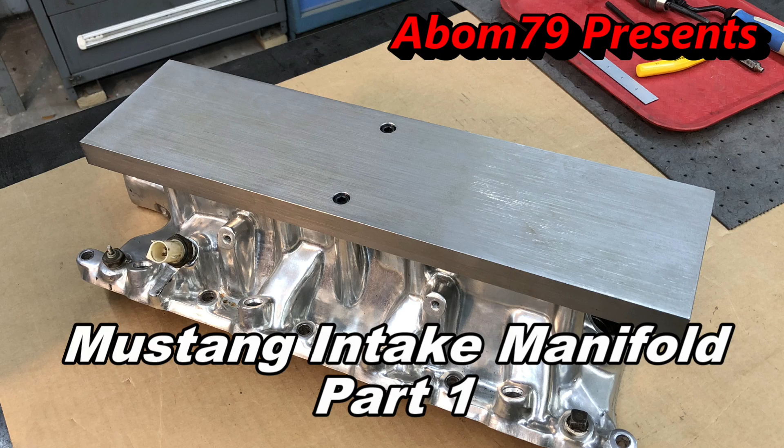I've got another intake manifold job to do for my buddy Phil over at Mayham Motorsports. He's the one that I machined the last manifold for. And this is another manifold that's going to a different car that he's been working on. I believe he said it's off of a Mustang. I believe this goes to the 5.0 Mustang.

And the problem is he can't get anything to seal up. Apparently this is an aftermarket intake that was on the car, and he can't get this stuff to seal right. The main culprit is this surface right here, which is where the thermostat goes in. I'll get you a better shot and show you, but I can put just my scale on there and see that this area right in here is way low. That's probably going to be 25-30 thousandths off right here. So this needs to be machined square.

And I've been checking all the other surfaces. This surface here, this is my good straight edge that has been reground. I can put this across there and I can actually rock it slightly. So it's off a little bit, it's a little bit high in the middle. So this needs to be cut right there. And then he said he also had another issue with, I don't remember what side, but one of the cylinder heads had a very minor leak to it and he couldn't get it to seal up.

So I checked these faces here that go against the cylinder head, and they're not perfect either. So we're going to plan on cutting all these faces. We're going to cut both sides that match up to the heads and make sure that they're good and straight. And we're also going to machine the top and then this face right there for the thermostat.

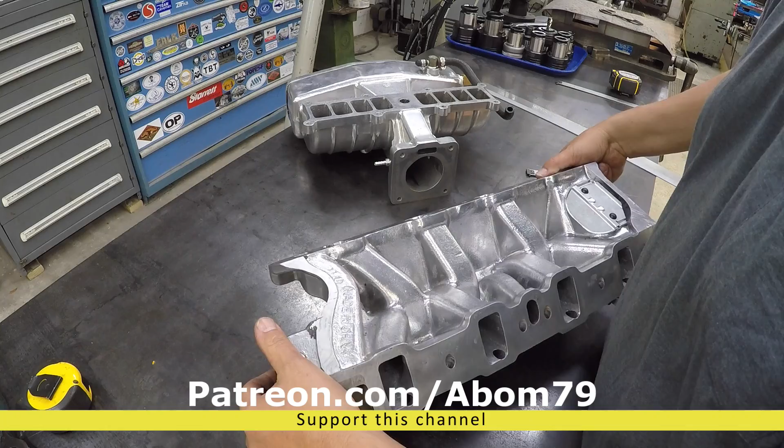The bottom of this thing was machined originally from the factory, so we've got a machined face right there as well as this. This should be nice and square, so we'll probably start with this face right here and flip it on like that, on some parallels. And what we can do is machine this face. We'll side mill that with an end mill, and then we'll run our cutter across this face right there and get that cut.

And then my plan from there is I'm going to take a piece of flat bar and make a fixture plate that's going to bolt to this right there. We'll use 6 of these holes, bolt a fixture plate down, and that way we can flip it over onto the fixture plate and be able to hold it. Then we'll go to the shaper and use it to rotate the table around and get this squared up. We'll cut both of these sides on the shaper. That's my plan of attack.

This is the piece that goes with it right there, and I've been doing some checking with the straight edge on these faces. He just wanted me to check it. He didn't think that there was anything wrong with them, but I'll check it before we get through to make sure that these are good. If these don't need to be cut, then we won't worry about that. He just wanted me to double check it while everything was apart. So let's go ahead. We'll start with the K&T mill and get our fixture plate going, and then we'll start getting all this milled in.

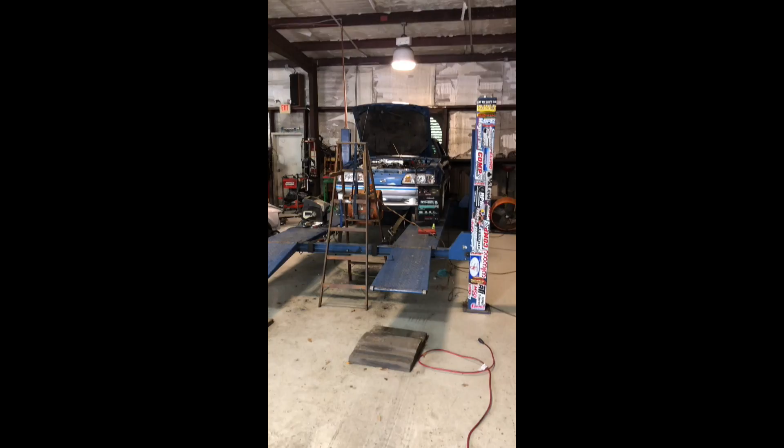This is the plate that we're going to use to make the fixture to hold this. This will also be sort of like a universal fixture for later jobs. We'll save it in case we ever need to use it again. It's a piece of 1 inch by 5 inch flat bar. It's been rusted up outside, so I went out there and wire brushed it good, but it was rusted all over. So I'm going to clean it up. I'm going to use a shaper. We've got it cut 19 inches long, and we're just going to square it up, make it nice and clean on the edges.

Another great use of the shaper is to cut rusty metal like this. And the plan is to machine it. I'll have a couple holes drilled in so that we can just use the center T-slot of the table on the shaper to just hold this plate down. But it'll also be drilled and

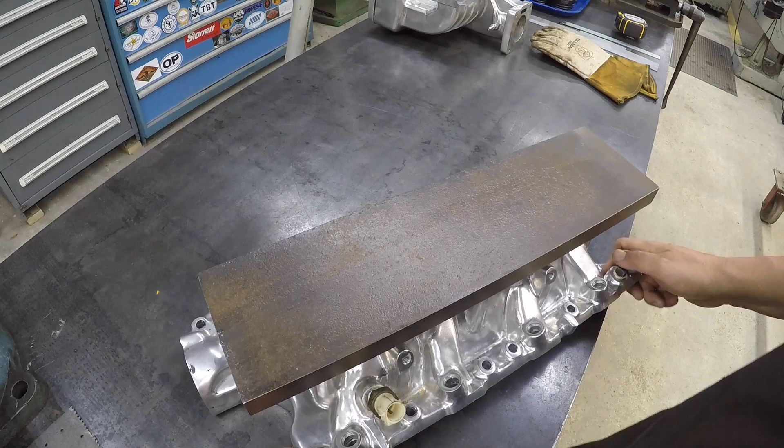counterbored for this hole pattern up there, 6 of the holes, so that I can just bolt it to the top just like that using our socket head bolts. And then this is what we'll clamp down onto the table. It'll be flipped upside down. So we'll give you some highlights along the way of getting this thing cut in and get it machined.

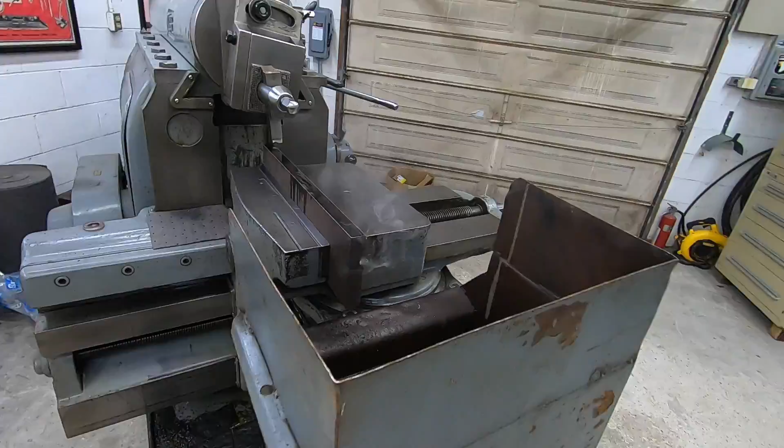We'll get both of the sides cleaned up first. Just make one pass across both of the sides, and then we'll do the top and bottom. That's just a 10 thousandths cut just to clean the surface up.

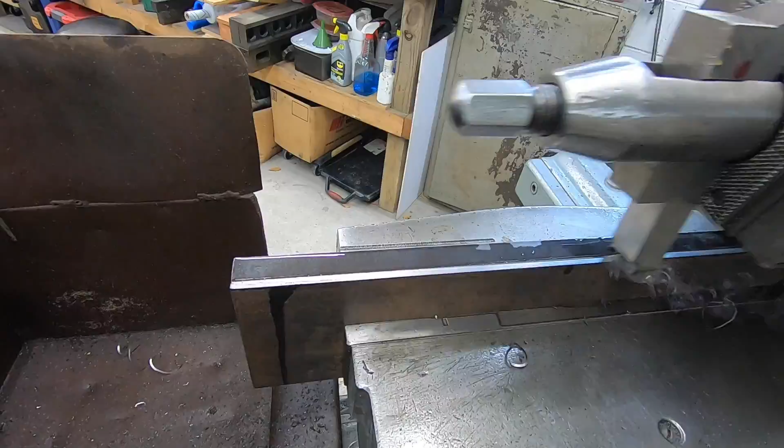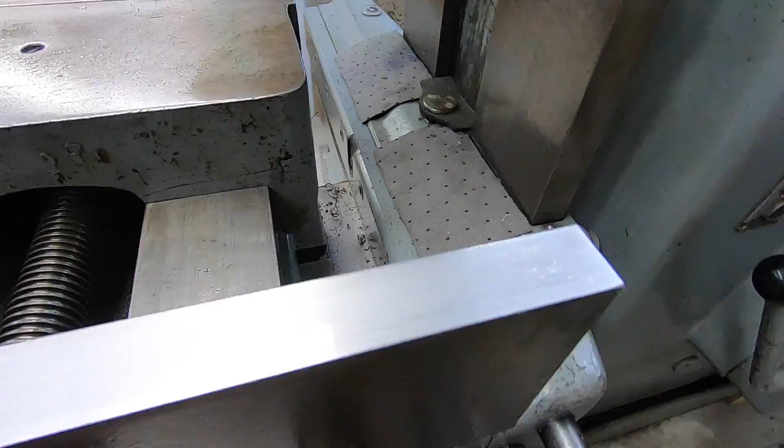Finish is looking good. I touched up the tool bit before I started. I reground it and then honed the corner, and it's leaving a nice shearing action on the metal. And I just hit that with my stone to deburr any fuzz on there. Ready to flip it over and cut the other side.

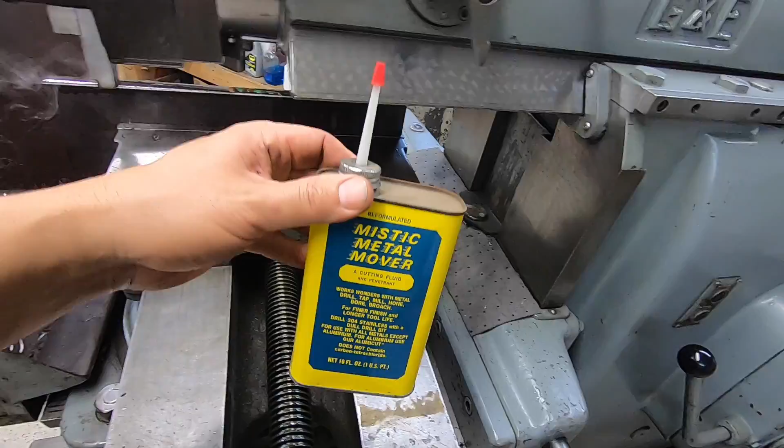This is the cutting fluid I'm using here, a Mistic Metal Mover. This was given to me by one of my viewers a few years ago, and I use it every now and then. I wanted to try it on the shaper and see how it does. It's got a little less smoking action than my sulfur-based oil. It seems to be doing good on there.

Got our first top side getting cut in. Won't take very long and we'll have that sucker done. So I thought I would go ahead and touch on one of the issues I always get on why a shaper. So let's go ahead and talk about just this workpiece right here.

This is a rusty piece of steel, and this shaper does a great job on cutting in rusty, pitty, dirty material using that high-speed tool that I can grind versus a carbide, a rotating cutter, or even a shell mill or an end mill or a fly cutter. I don't really like using fly cutters unless I really need to, but it does a good job on that kind of job right there.

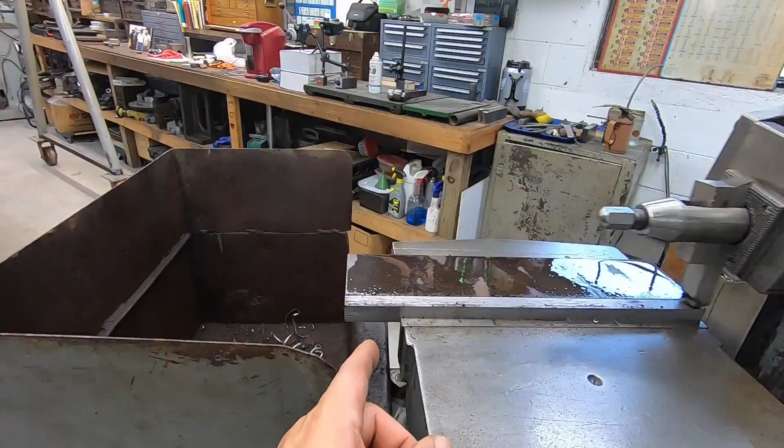The other thing, we've got the vise right here is 16 inches long. So you got a lot bigger vise than our standard milling vise over on the milling machine table. That workpiece is 19 inches long. You see I'm just hanging it off a little bit on that side. So you got a lot of rigidity holding that piece. And just look at it, it's doing a great job. Once I clean that oil and rust off, it's gonna be a beautiful finish on there.

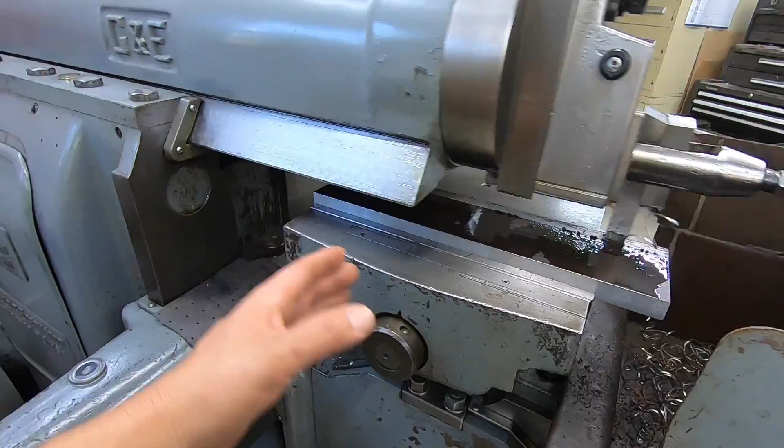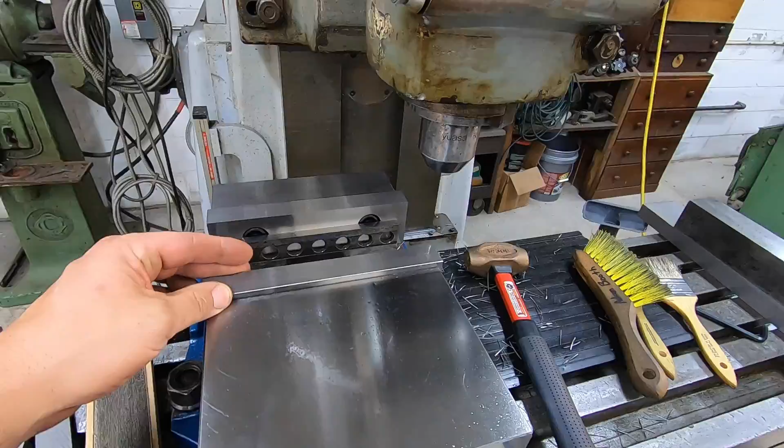So, like I said, you see how wide the vise is, so you got a lot more support holding the workpiece. Even if I'm using my 8-inch milling vise here, you got 8 inches jaw width and you've got a lot more material hanging off the end out there. And not to say that that wouldn't work over here, but you really want to support more of your workpiece if you can. So you could put some jacks under it or whatever to try to stabilize it.

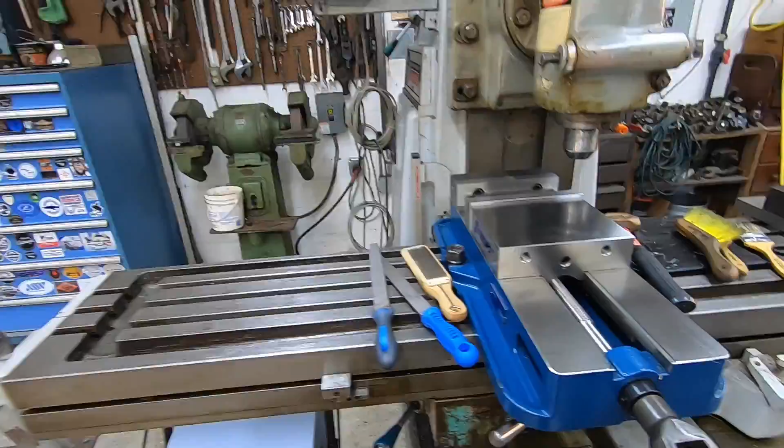So if this vise was not set up on this machine, I probably will always go over to that shaper and use that machine if it's available, if that vise is set up. A lot of times it depends on which one's set up.

If the shaper is ready to roll and I'm just ready to start cutting, I'm gonna go over there and do that. If the shaper is not set up and I gotta mount the vise on it, true the table up, but this vise is ready to go, then I'll probably come over here and do it here instead, just because I've got less setup to do. So that's one of the factors there as well, is which machine is ready to go.

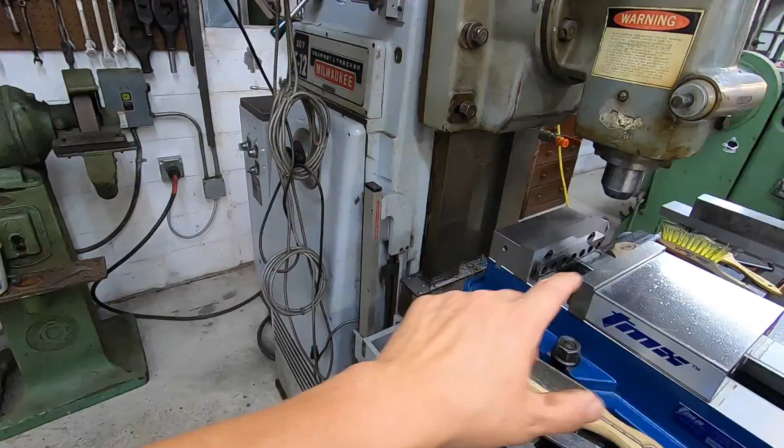You know, you gotta install a face mill in there and get that set. And the other thing is, when you use a big face mill over here, if you're gonna do some milling, it slings these chips everywhere. So you've got a big cleanup to do once you do a little bit of milling over there. Look at the cleanup I gotta do here.

It just puts it right in this box here. Very little gets on the floor, on the machine. So a lot easier cleanup over here because you have better chip control of the chips coming off into the box.

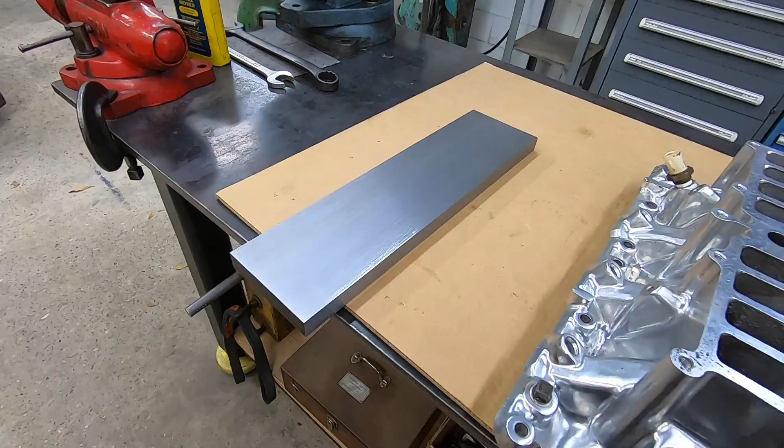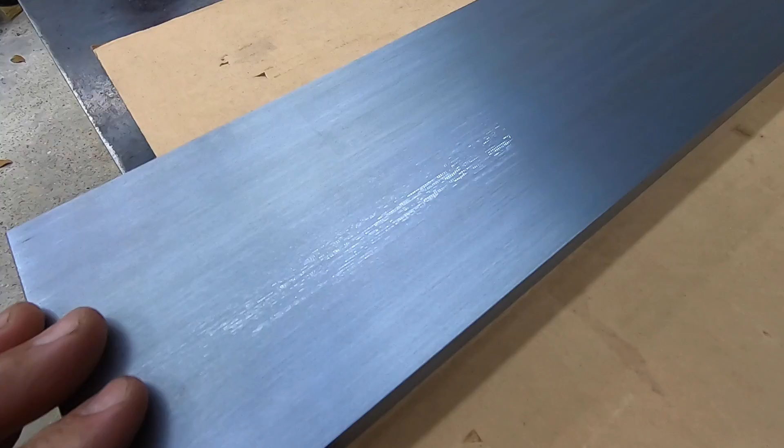We're finished up cutting the fixture plate there on the shaper. It turned out real nice. We've got it deburred and clean. You can see it just does a good job. And that's a rough cut right there. So if we wanted to finish that, we can certainly make a lot nicer finish. But I like the way that feels. It's got the cut lines in it, and I rubbed the stone over it there to make sure that it's all smoothed off and good.

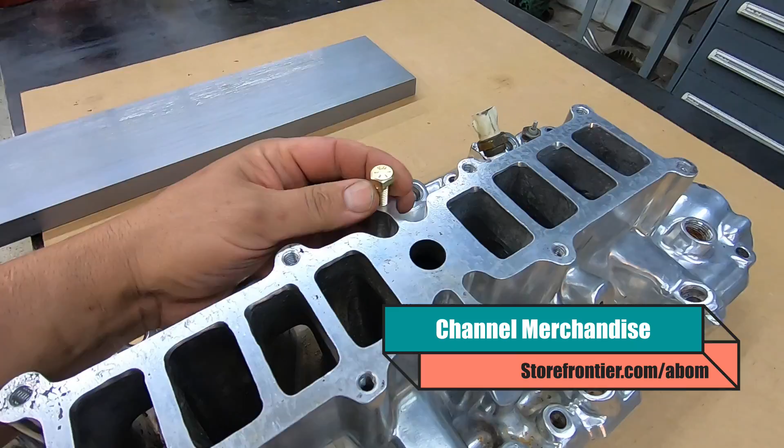So the plan is to drill it, counterbore it for 6 holes. You got the 2 in the center, and then we got the 2s on each end right there. These are 5/16. Verified it with a 5/16 bolt. I'll need to run down to my local hardware store and get me some socket head bolts, proper length, because I don't have any. All I've got is these guys.

So we'll probably go ahead and set this in the mill. Go ahead and get these 2 first, since these are going to be in the middle. We'll just center up in the mill, drill and counterbore those 2, and then we'll get it bolted on there. I'm going to use my transfer punches. We'll put our little transfer screws here, bolt it down with this, that way it's kind of square, and then we'll tap it and that'll locate the placement of the other 4 holes there.

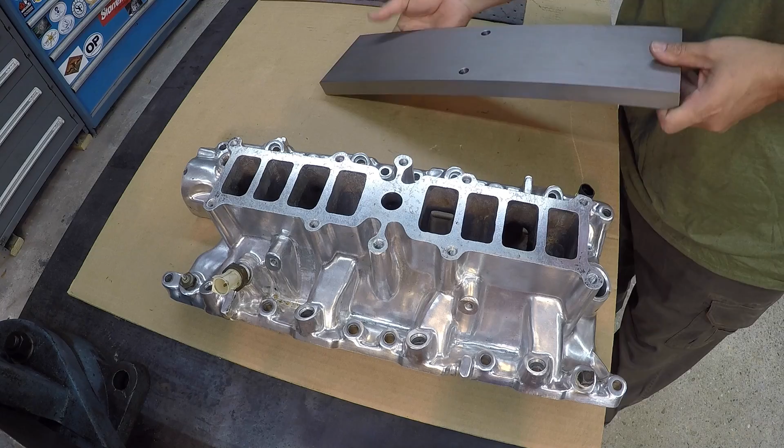I went ahead and got a head start on the fixture plate here. We got 2 of the holes drilled in there, and that's going to be for these 2 center holes right here. And the reason for that is, since these look like they're kind of symmetrical with the shape of the part, we want to go ahead and get this bolted down, and we're going to transfer the end bolt locations to the plate. And I just wanted to make sure it was kind of square in line with it there.

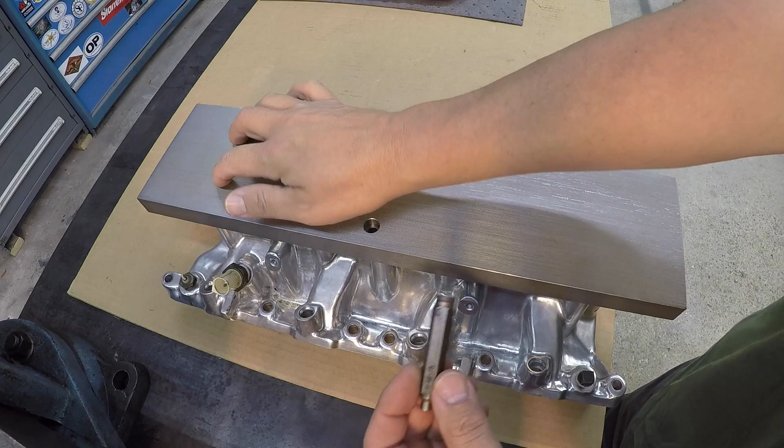So what we're going to use are these Mayhew transfer screws, and we'll put these in these 4 outer holes. We'll bolt the plate down like that with our Mayhew transfer screw points just barely sticking up out of the holes, and then we'll take our soft blow hammer and just tap each end to transfer the hole location, and then we'll go back to the mill and drill and counterbore those 4.

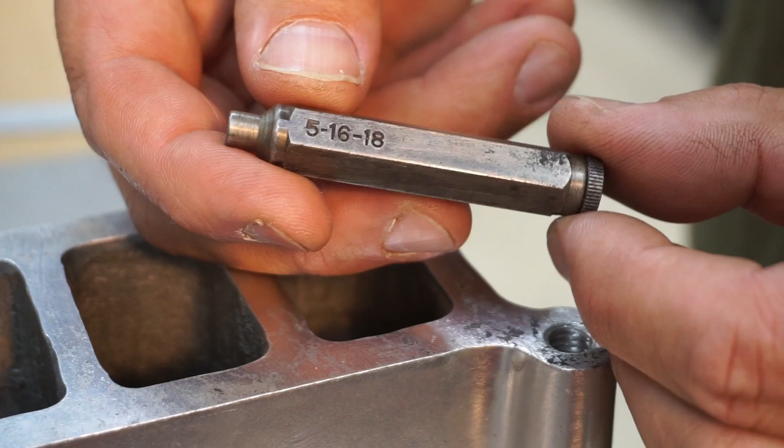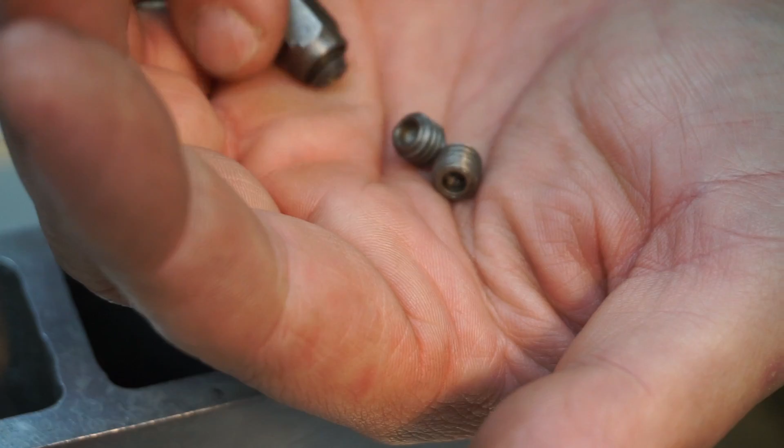We're going to be using these 5/16 socket head screws right here to hold it down in place. This is the little set of transfer screws that we're going to use, made by Mayhew. I've got a different set, different range of these. See, this is 5/16-18, so you just unscrew the cap there, and inside of it you'll have your transfer screws. So I'm going to take 4 of them out of the set right there. Take these out of the way, and then put our cap back on.

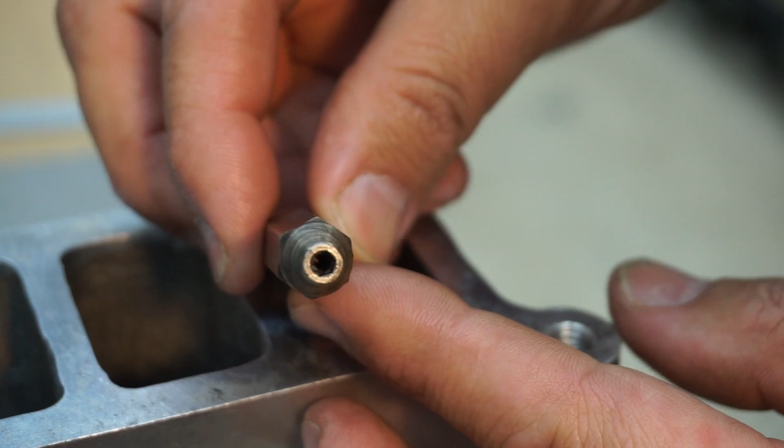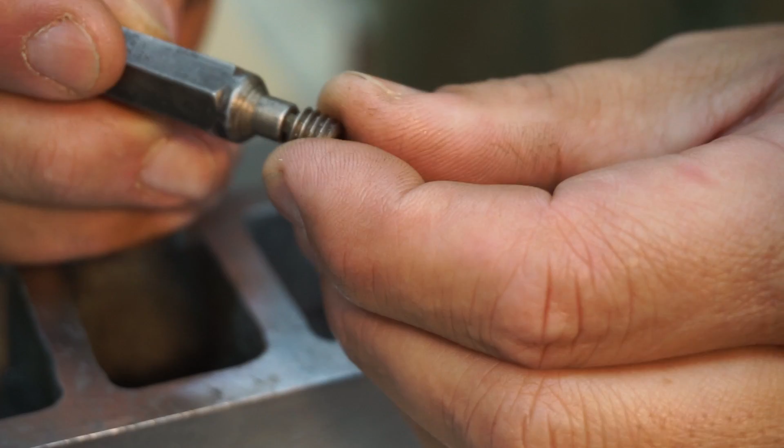And then the end of the tool right there is the install tool. You can see we've got our point on the end of them. Go ahead and insert it into the install tool there in the case. It's a multi-purpose tool, and we'll go ahead and just get them screwed into the hole here. We'll get these 2, and then we'll set our height of the point.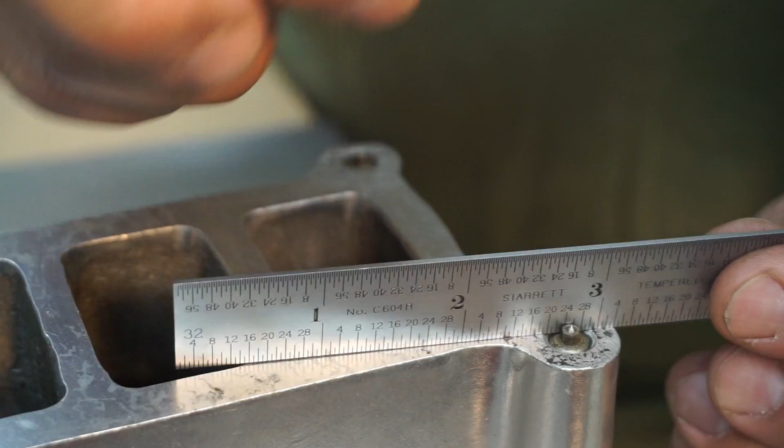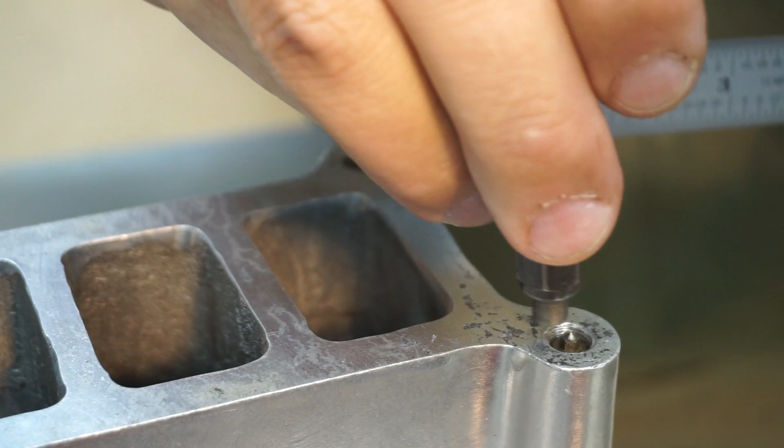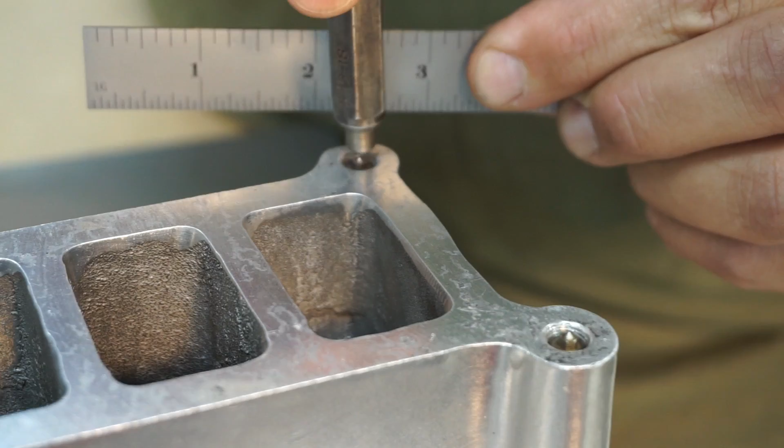And usually what I do is I'll just take the scale there, lay it up against the face, and screw it in to where it just goes over the hex, but the point of the screw is sticking up. So it doesn't take a lot, it's just touching it right there. So that's it right there, just the point is sticking up. Alright, and we'll do the same thing over here. There we go, just the point of it. Alright, and we'll do that on the other end there as well.

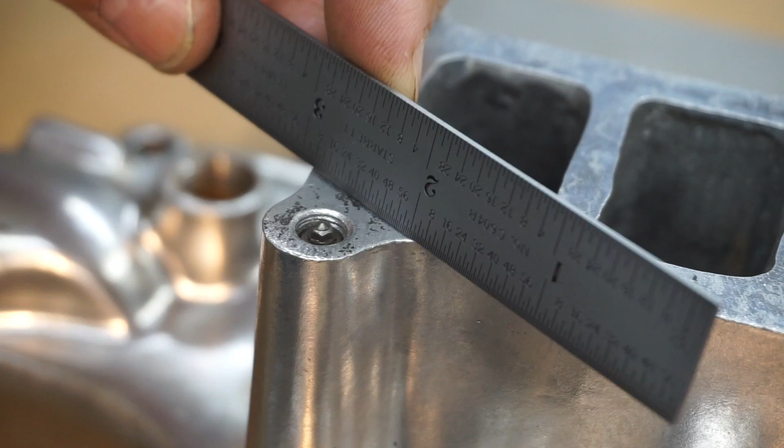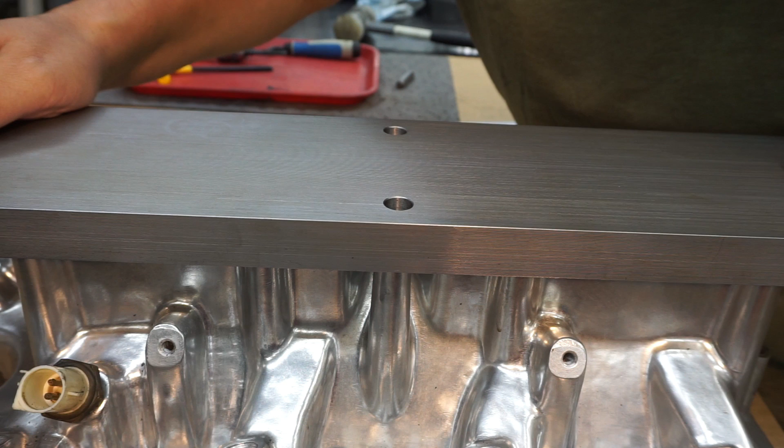Okay, I think we got all 4 of them ready to go. We'll go ahead and take our fixture plate here and set it on there nice and easy, so we're not making a bunch of scratches and dents there where the transfer screws are. Get our bolts in there. Get one started, and then we'll start the other here.

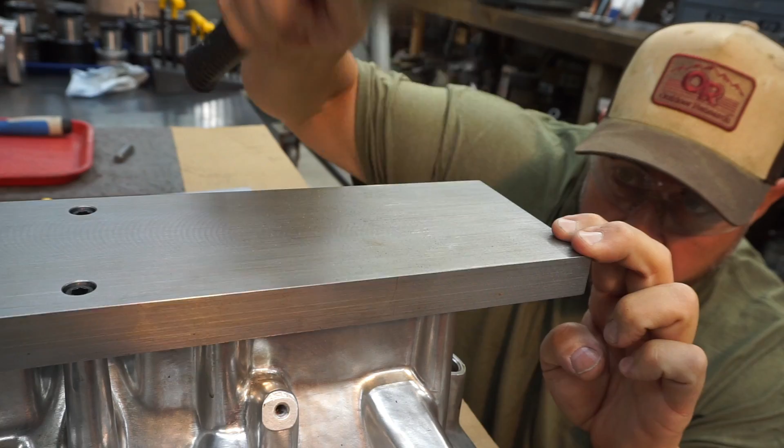We got them both snug down, so I can tell it's sitting up on the points. Yep, trying to pull it down. So we'll go ahead and give her a tap with our hammer now. I'm just going to look down here and see where it's at. We'll do it right there. All right, go to the other side and do the same thing.

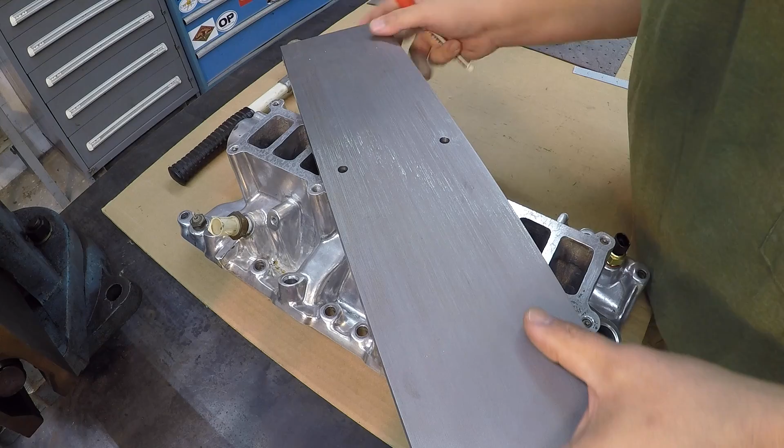Alright, let's see how our transfer points look on it. I'll get my marker. Yep, we got four good locations there. I like to just take and highlight the areas that I'm going to be lining up on and put a circle on it just so that you can see it.

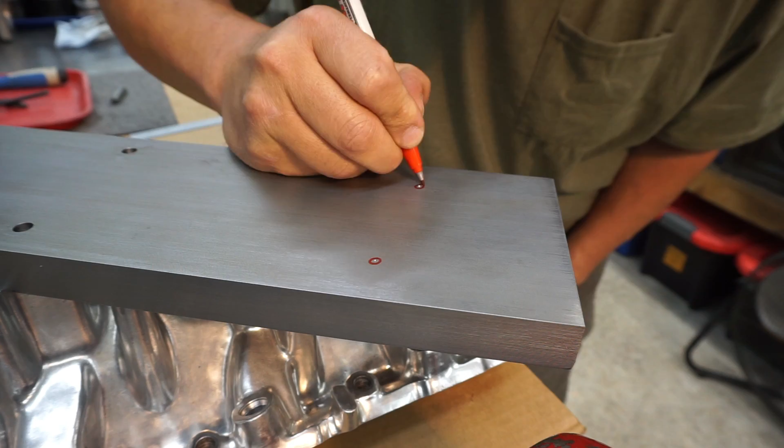And let's go ahead and, tell you what, since we put it like this, I'm going to go ahead and put a mark here on the side, put a mark here on this corner, and I'll know that those two marks, that's where it lines up at, just to kind of time it there. Alright.

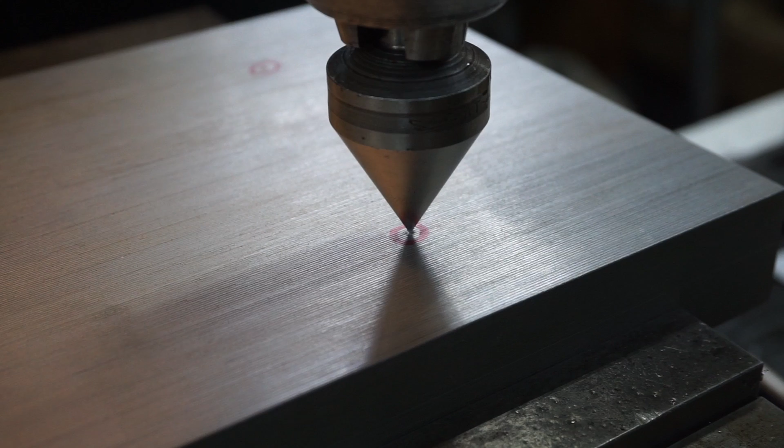Okay, we are ready to go back to the mill and do our drilling there. Since we did it this way, what I'll have to do is drill the holes, and then we'll have to flip it over, line up our hole with our drill, and then counterbore it for the socket head bolt. I'll get the punch marks lined up real quickly using my center, just visually, running the point down in there very softly, and then we'll come back with my coaxial indicator and actually indicate the punch mark there.

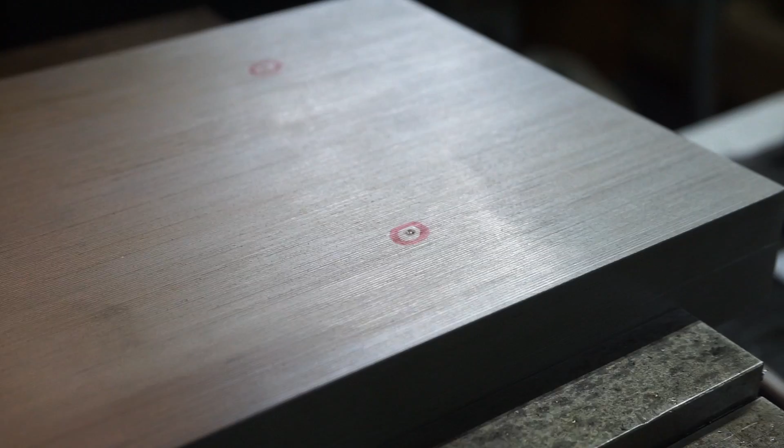We got our Blake coax in there. This is what I'll use to very quickly just line up the 4 holes. I'm just going to show you one right here, and we'll get it done. Just go side to side and make the movements that we need. It's walking around, and this particular punch mark, for whatever reason, that tip shattered whenever I tapped on it, so it doesn't have a really true point down in that one there.

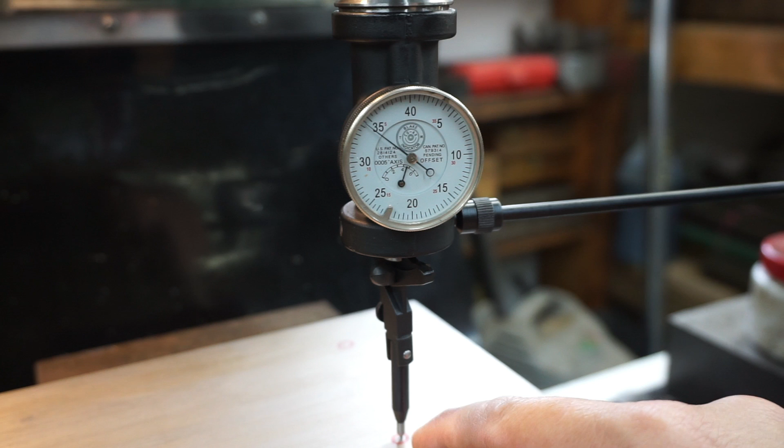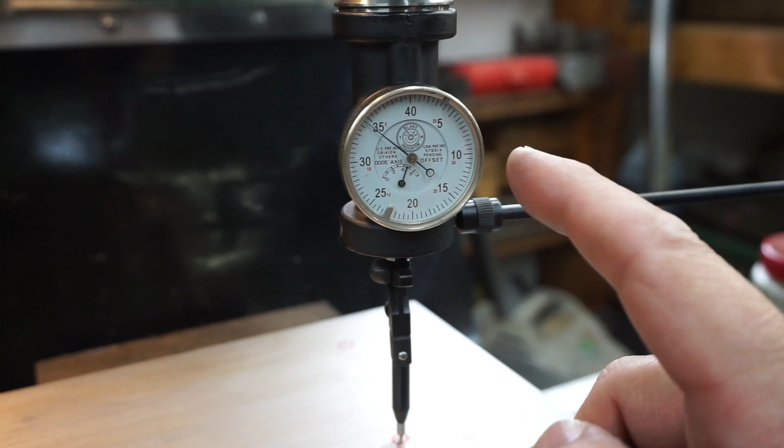So we're really close enough to what we need to be. It doesn't have to be any closer than that, so we're just going to leave it right about there. But I'll show you another one so that you can get a little better idea of what's going on here. Start with a center drill and go ahead and drill the center point there so that we know our drill bit's going to track correctly.

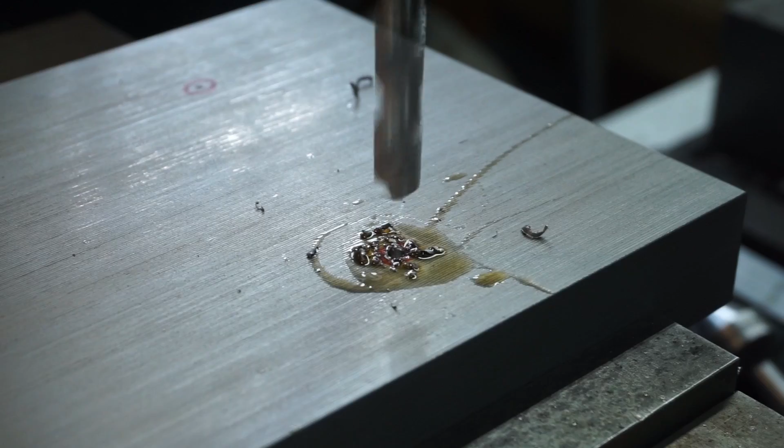Here's the next hole. Maybe you can see this one a little bit better since it won't jump around like the first hole. Moving the y-axis on the mill now. Plenty good enough right there.

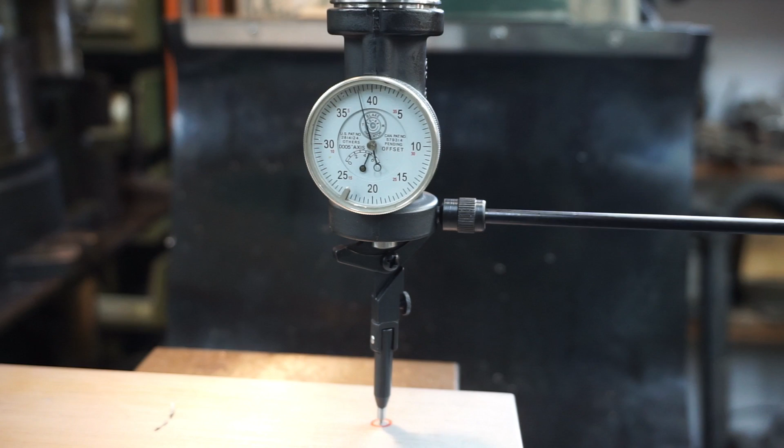Alright, we got all of our holes drilled, so I've got the piece flipped back over, and we're going to use our Blake here to line up on our holes. I thought I would go ahead and show you this again. Keep in mind, that's just a drilled hole, so it's not really smooth, so it'll jump around a little on that rough drilled hole there.

Just moving both the X and Y axis here to get it lined up. We'll get it within 1 or 2 thousandths, and then we'll leave it alone. That looks like it's pretty darn close, right about there. So we'll go ahead and just leave it there, and then we're going to use our counterboring tool.

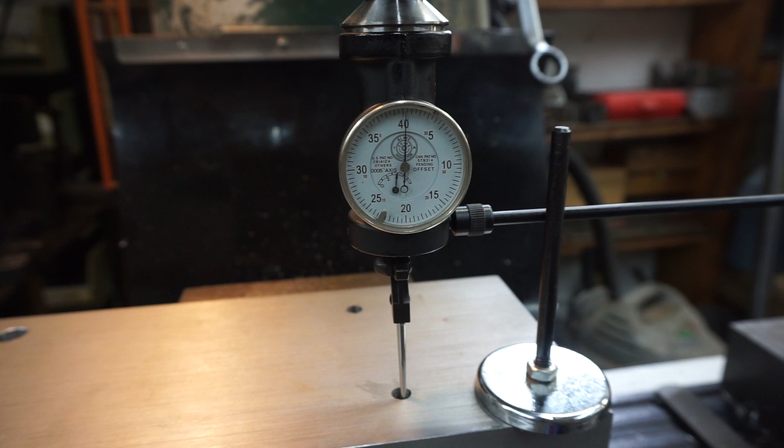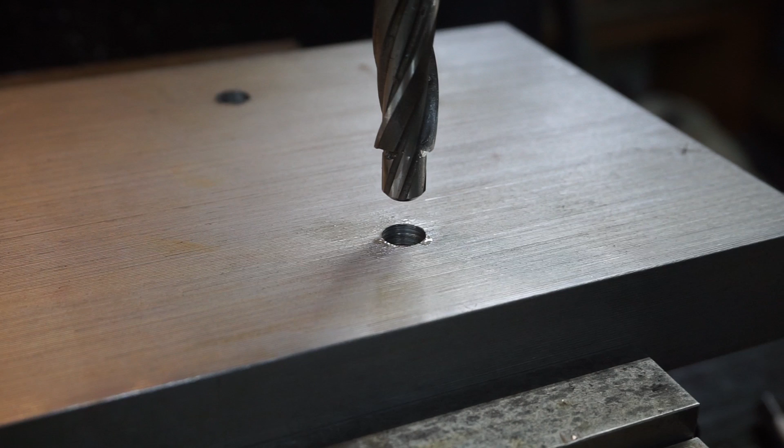Let me find that. Here's our counterboring tool that we're going to use. It's already got the pilot ground into it. Chuck that up, and I'm going to go 3/8 deep with these holes here. Take my counterbore tool and just very gently touch the surface there. I'm going to zero out my quill DRO here.

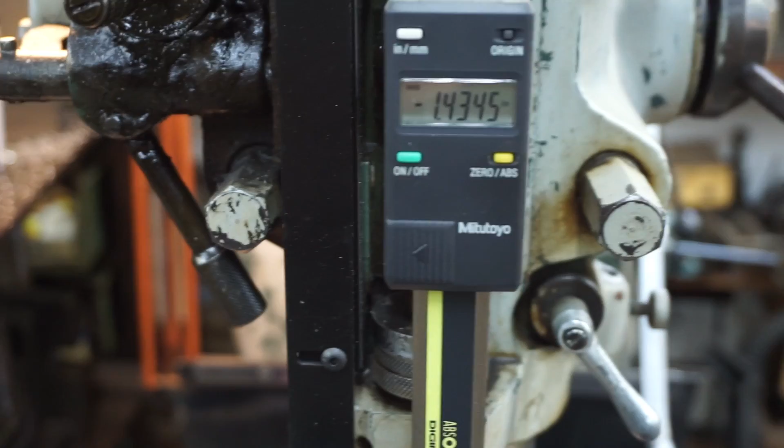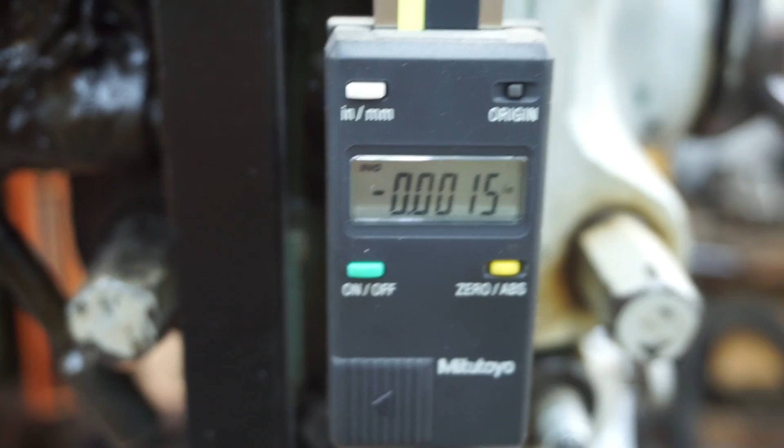Here's the quill. Just come in here and zero that out, and then we'll move it down 3/8 of an inch. I run these guys kind of slow. This is not the kind of tool that you want to replace a lot. It does a good job though. Just keep it well oiled.

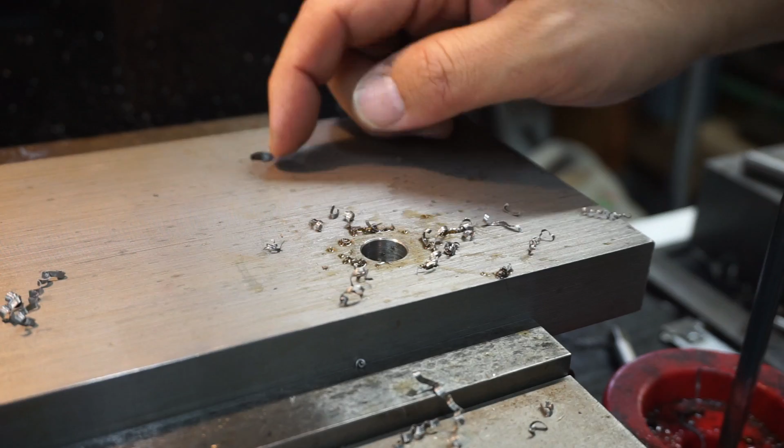Just watching my quill. We're going to sneak up on the 375, and there it is. All right. And to finish it off, we'll just break that edge with this chamfer tool, make it look nice, and there we go. So we got 3 more to do. I'll get those other 3 done, and then we'll bring it back and we'll test fit it over on the

manifold. All right, guys, we got it all drilled and counterbored. Only thing left to do really is I got to drill my 2 holes for the studs to hold it down. I was going to do that after we get through this because that's real simple. So let's go ahead and test fit it. Got my red mark here, red mark over here, making sure there's no chips or dust on it.

Just kind of eyeball it there, and with that plate right there, I can tell that that surface is not flat. I can make it rock a little bit, but we're going to deck that first before we bolt it on there. So I've got 4 screws the correct length here, and then I've got 2 that I'm going to have to cut. They're a little bit long, but let's go ahead and check and make sure our hole pattern is going to work. Everything's going to line up.

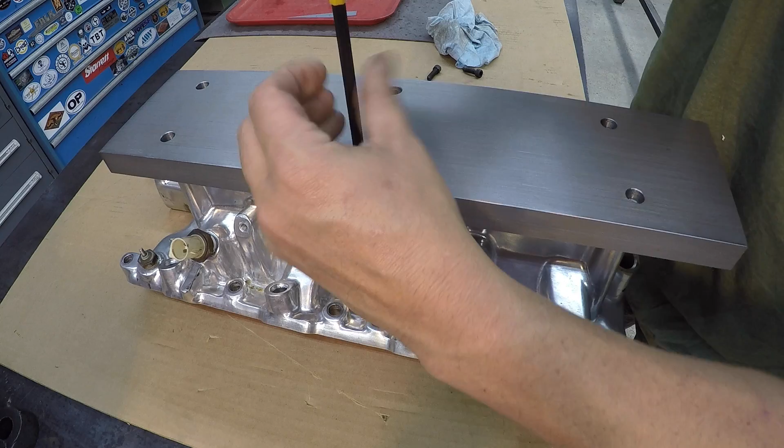All right, so far so good. That one's going in. That one's going in. We got 2 more. Let's see how it does. Good. That one's screwing. And that one's screwing there. So these are the 2. I got to cut a little bit off those. I'll just take a side cutter on the grinder and lop those off. And then that'll be ready to go.

So what we're going to do is, since I've got it just kind of sitting in place, I want to get a measurement on the plate here. I want to get a measurement here. This is where we're going to have a hole drilled, so our stud and our flange nut will bolt down right here. So it looks like we've got approximately, let's just say 3 inches right there. So I'll probably come in, I'll take a flange nut. Let me grab one. Probably go ahead and use my 5/8 hardware.

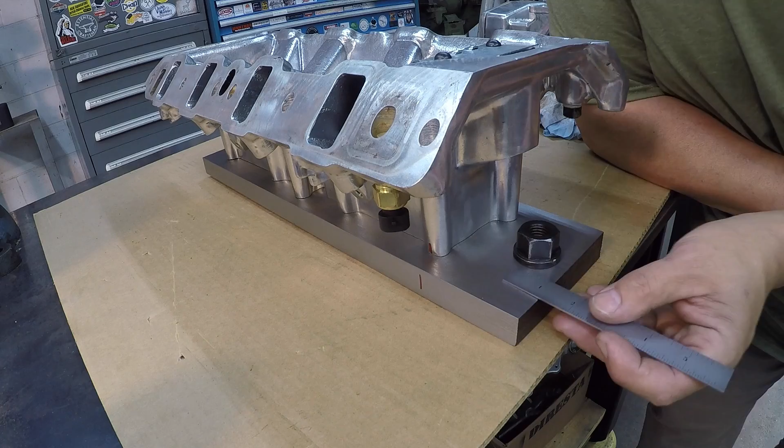So we're going to take this nice flange nut, one on each side, and just have it drilled so that we can put our stud and a flange nut on each end there. So let's just say 1 inch from the end looks pretty good. Looks like it's right about in the center of that flange nut there. Let me double check the other side. This one's a little bit shorter over here, so we got about 2 inches. So 1 inch should suffice there as well. We'll go about 1 inch to the center, and that'll give it some good coverage. So that's our next plan of attack. Go ahead and get these 2 holes drilled.

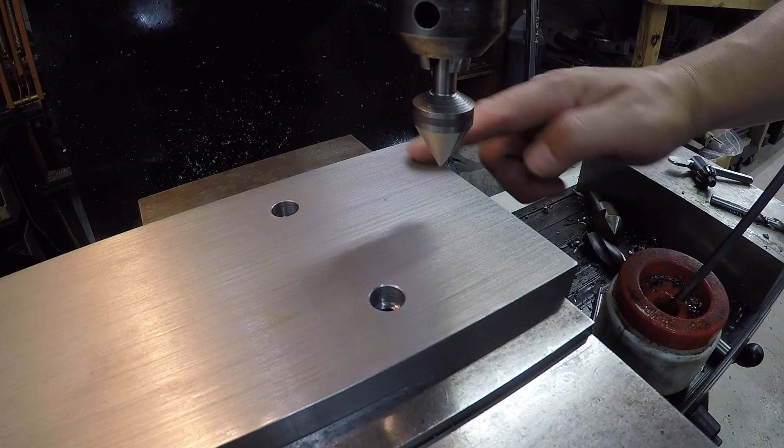This is the setup that we'll use here. You put our T-nut in the slot, shortest 5/8 stud I got right there, and then a flange nut to hold it in place. So it's going to be like that, or actually more like that right there. We'll drill the end holes 41/64, so that's clearance over a 5/8, and I've already found the center, and I'm just going to use my hook scale here to quickly scale it 1 inch from the end. I just hook the end, line up the point on the rule there, and just visually line it up on the 1 inch mark, just like that.

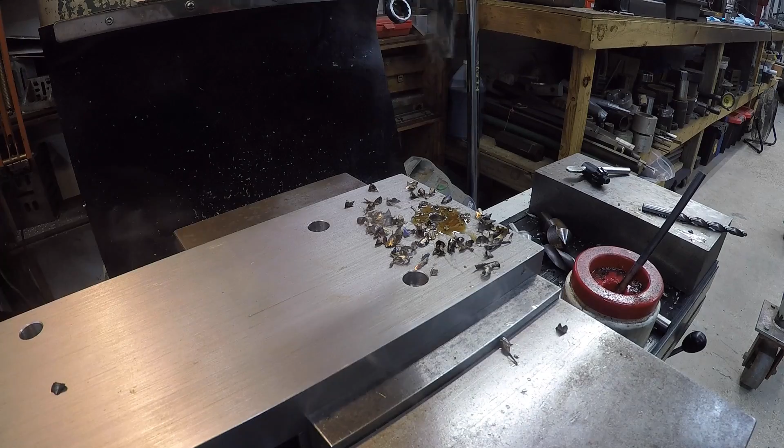Running 210 on the spindle here for the 41/64. And don't forget to break the edges, get rid of the burr. Like that. All right, and of course I'll flip over the other side, deburr it. So 1 more hole to drill and we'll be done with our fixture plate.